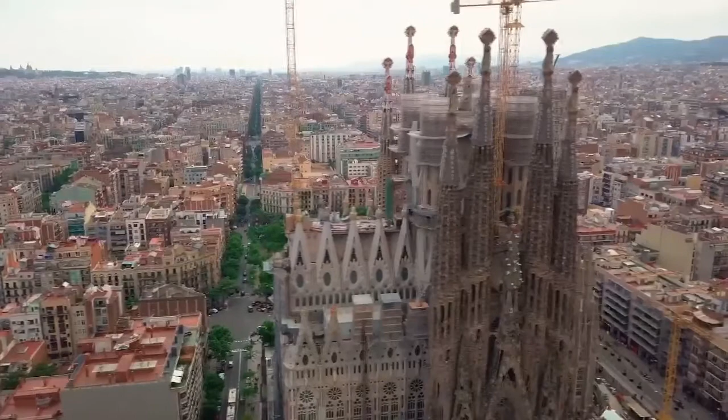There are five different fields in structural engineering. Firstly is building, of course the most obvious. Structural engineers help design and construct buildings so they stay standing after the scaffolding comes down. Structural engineers also build skyscrapers, opera houses, and football stadiums.

Secondly is aeronautical. Aircraft, satellites, and even space vessels need to be developed, and the role of the structural engineer is fundamental in this process. We also create structures that can withstand the rigors of their environment and operate consistently under these conditions.

Thirdly is oil and gas. Whether it's a pipeline, a rig, or a gas or oil field, one thing common across this kind of exploration is structural advancement. We need to prepare for massive projects, whether designing, testing, or inspecting equipment.

Fourth is nautical - passenger vessels, cargo ships, and boats of all other kinds form the bulk of engineering at sea. Fifth is bridges, whether it's a footbridge over a stream, a bridge over a gorge, or a road bridge.

Thank you. The subfield for civil engineering is Introduction to Environmental Engineering. We learned the signs of global warming, which include melting glaciers, rising sea levels, and extreme weather. We also learned the role of the environmental engineer, which is to provide safe drinking water, maintain air quality, and prevent and control water pollution.

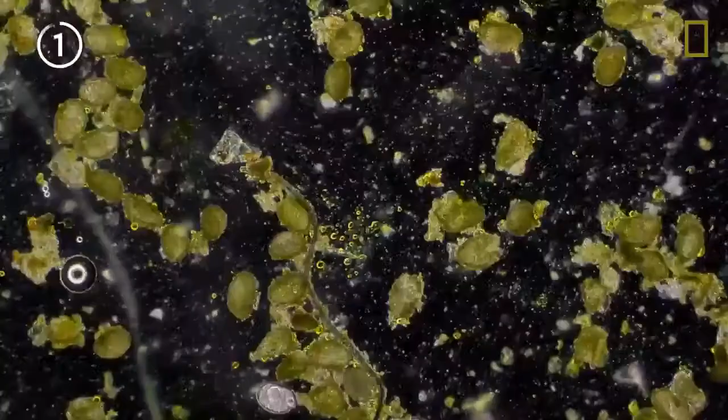Environmental engineering can be applied in many fields: water treatment and supply, sewage, industrial wastewater treatment, industrial and hazardous waste management, water quality management, air pollution control, noise pollution control, solid waste management, and environmental management.

In the Bachelor of Civil Engineering course, we will learn 3 core subjects: water treatment, wastewater engineering, and environmental engineering. We also learn industrial and hazardous waste management, water quality management, solid waste management, and air and noise pollution.

We learn all these subjects to achieve the sustainable development goals set by the United Nations. In conclusion, all these goals require us to maintain good health and well-being, climate action, life below water, and life on land.

What is coastal engineering? Coastal engineering is the division of civil engineering responsible for the organization, conception, development, and preservation of works on the shoreline. Coastal works involve the management of shoreline erosion, improvement of navigation channels and harbors, protection against flooding brought on by storms, improvement of coastal recreation, and management of pollution enabled by marine environments.

Coastal engineering typically includes the development of structures, in addition to the transportation and probable stabilization of beach sand along with other coastal sediment.

Geotechnical engineering generally deals with natural materials near the Earth's surface, utilizing the principles of soil mechanics and rock mechanics in designing safe, economical, and environmentally sustainable foundations, retaining structures, and earth structures. Geotechnical engineering relies on knowledge of geology, hydrology, geophysics, and other related sciences for the solution of engineering problems.

There are some applications in geotechnical engineering, which include military, mining, petroleum, coastal, and ocean.

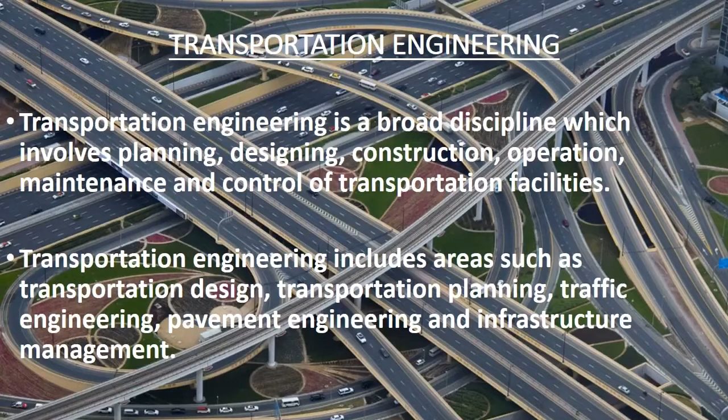Moving to the next part is transportation engineering. Basically, transportation engineering is a broad discipline which involves planning, designing, construction, operation, maintenance and control of transportation facilities. Transportation engineering includes areas such as transportation design, transportation planning, traffic engineering, pavement engineering, and infrastructure management.

Last but not least, transportation engineering also involves specifying, designing, constructing and maintaining transportation infrastructure such as streets, canals, highways, rail systems, airports, ports and mass transit.

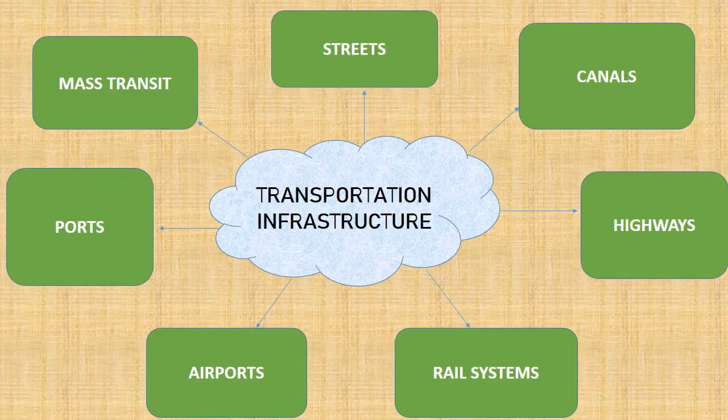The assignment we did is the survey of a building, which provides the basic data required to design our building. Basic data includes member arrangement, size, and ratio of material. We need to calculate the total weight of a type of building, and choose any faculty building that we need to calculate.

Firstly, we need to draw a sketch drawing of the building, showing the structural layout and dimensions. Then we need to carry out approximate measurement of each part, including calculating the weight of roof, slab, beam and column based on approximate density.

We need to calculate the weight of the whole building, not just a part of it, the whole building. We also need to calculate the load carried by each beam and column. This work must be carried out and submitted in a group, which contains 5 to 6 members.

For this assignment, we combined with group 55, and the assignment includes an individual short video lasting 4 to 5 minutes describing an issue related to environmental engineering. They chose a water pollution issue, describing its causes, how to solve it, and its effects.

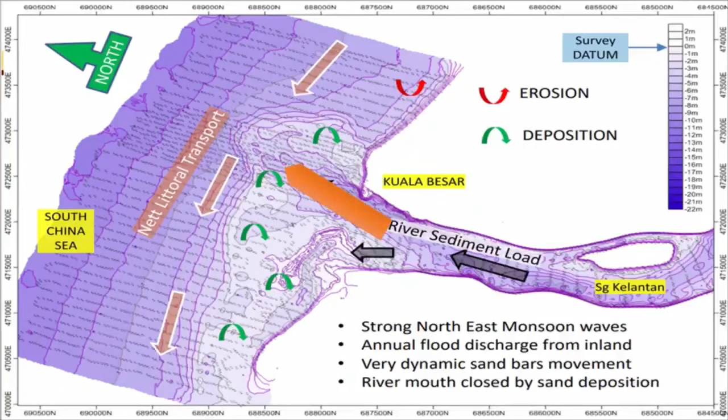This is the layout map of Kuala Besar, Kelantan, showing the deposition area and erosion area where sand was carried away by annual flood. My team decided to dredge the navigation channel at the mouth of the river to allow access for boats into the river at all times. Next, we suggest reclaiming these two areas.

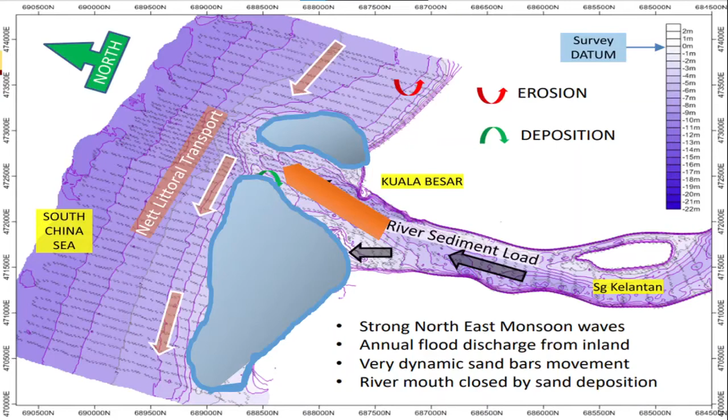The first thing we did was calculate the volume of sand required to be reclaimed, and where we can get that sand for reclamation, which comes from the deposition area and the dredging channel. But before that, we need to calculate the volume to find out if there is enough for reclamation. If the sand is insufficient, the remaining sand will be imported from another place so the reclamation work can be completed.

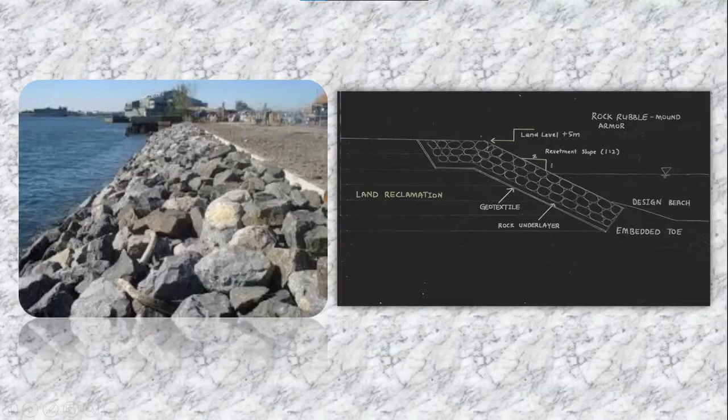Last, the revetment must be added to the reclamation land to reduce coastal erosion when flooding happens. That is how we solve the erosion and deposition problem.

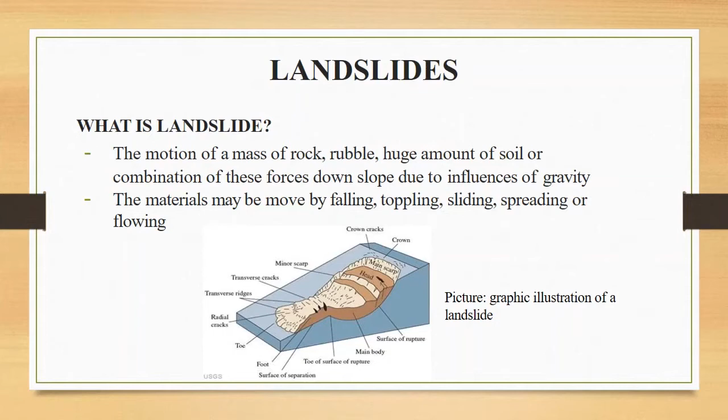In geotechnics and transportation engineering, there are three main issues: landslide, traffic congestion, and flood. First, a landslide is the motion of a mass of rock, a huge amount of soil, or a combination of these, moving downslope due to gravity, which may move by falling, toppling, sliding, spreading, or flowing.

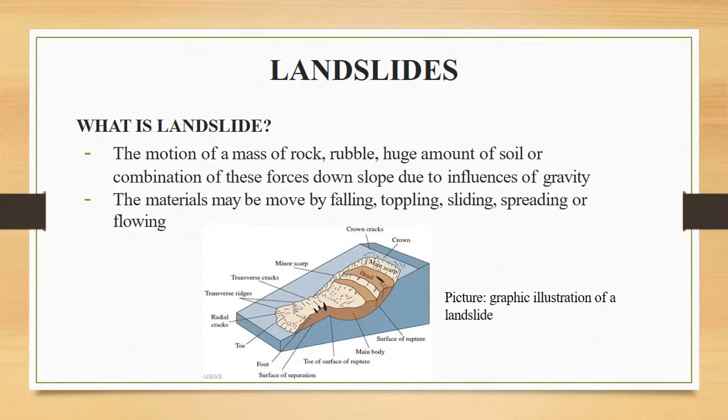Landslides have geological or human causes. In terms of human causes, this comprises excavation of slopes, deforestation, and logging. Landslides can be prevented by engineering solutions such as constructing retaining walls and piles, and insertion of reinforcement elements.

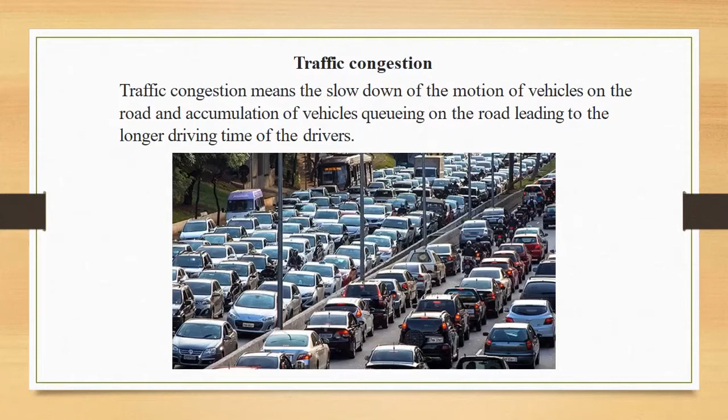Moving to the next part, traffic congestion is the slowdown of motion of vehicles on the road and accumulation of vehicles queuing on the road, leading to longer driving time for drivers. Traffic congestion can be prevented by improving the road system standard, such as building more roundabouts, optimizing traffic light management, and increasing road capacity.

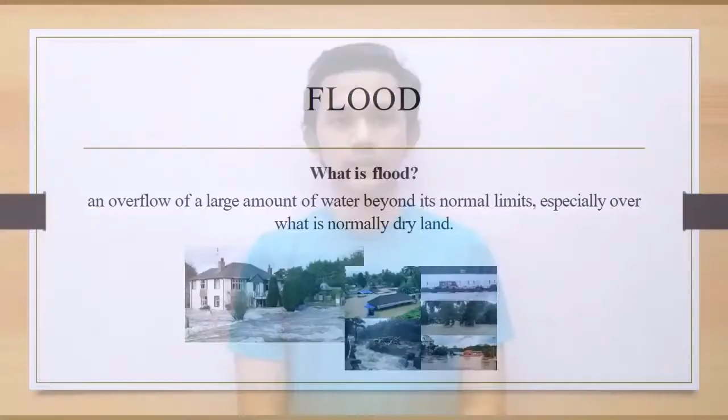Last but not least, flood, which is an overflow of a large amount of water beyond its normal limits, especially over land that is normally dry, commonly caused by heavy downpours of rain on flat ground and reservoir failure.

To overcome the flood issue, based on engineering solutions, flood control dams can be constructed alongside flood diversion tunnels to retain flood waters and reduce the occurrence of floods.

To summarize the assignment on structural engineering and environmental engineering, we can conclude that structural engineering needs to apply environmental engineering in construction work. This is because environmental engineering requires structural engineering to manage solid waste, industrial waste, and hazardous materials. If they do not do that, it will affect human health and the environment.

Furthermore, structural engineering needs to make sure all noise and air pollution can be handled well, because this pollution needs to be reduced before it gets worse. We can see that the relationship between structural engineering and environmental engineering is very important to prevent environmental issues such as water pollution and global warming.

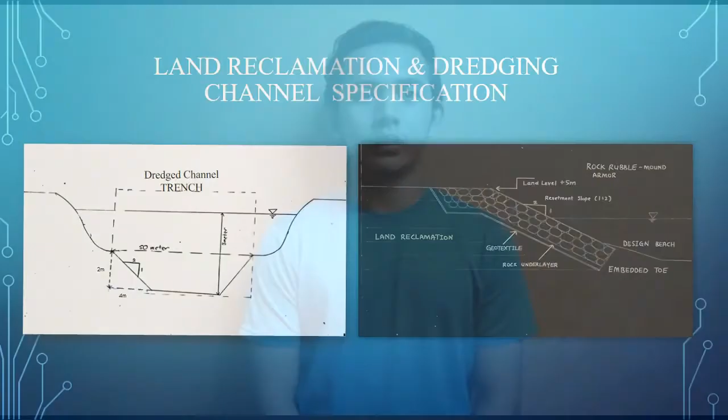In the coastal engineering assignment, we were assigned to provide a conceptual design for coastal land reclamation from the river mouth of Sungai Pengkalan Datu to the river mouth of Sungai Kelantan. The reason for the proposed land reclamation is to provide new land areas in place of the eroded coastlines.

Besides, we were also asked to provide the layout of the navigation channel that can be dredged to allow access for boats into the river at all times. In addition, we had to estimate the size of the land area to be reclaimed, the volume of material required for reclamation, and the volume of sand from the dredged channel.

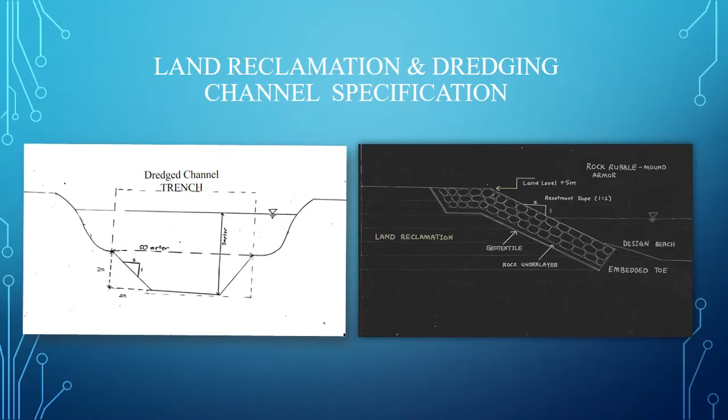The next part is geotechnics and transportation engineering. The task was to explain issues related to geological, geotechnics, and transportation engineering in tropical climate. There are three main issues: landslides, traffic congestion, and flood. The assignment also states that each issue has various causes and some engineering solutions to overcome these problems in our life.

In conclusion, geotechnics and transportation engineering can help people in their life and ensure the provision of safe, economical, and environmentally sustainable transport services.